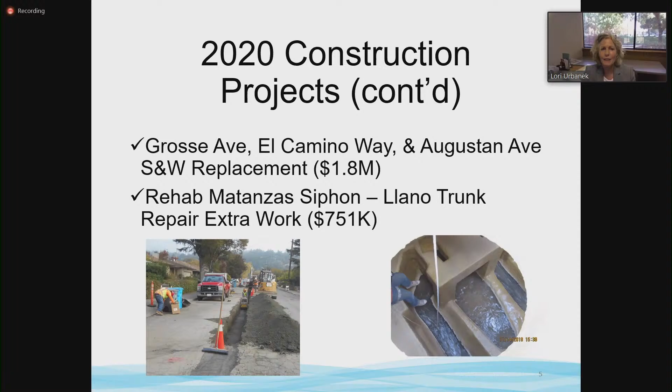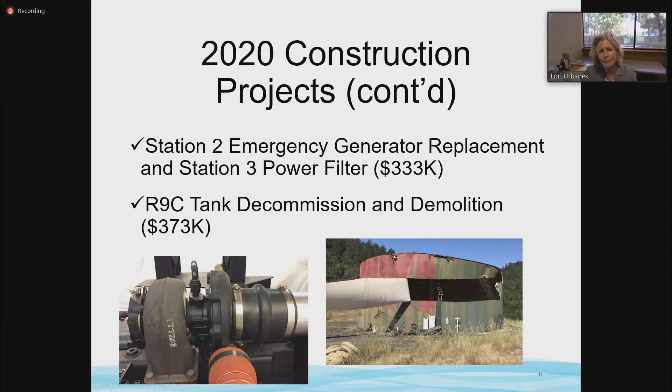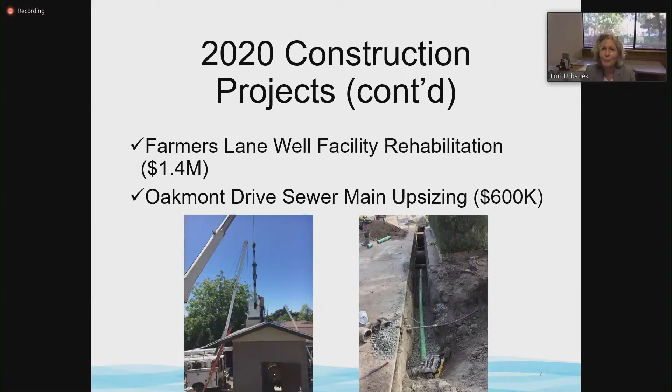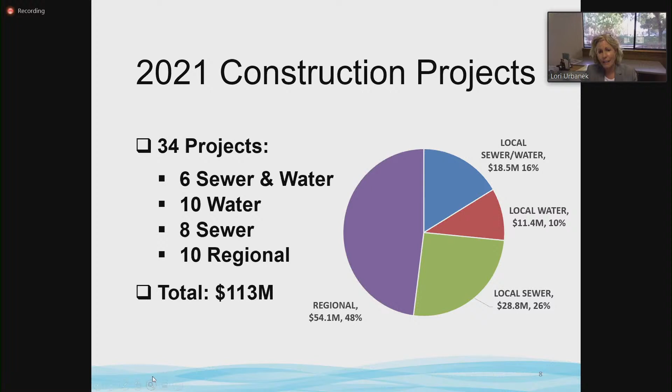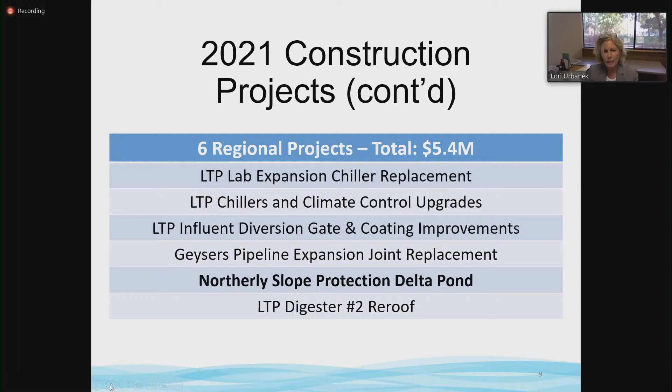These next several slides are going to list the projects that we have coming up, and there are a number of them, so I won't belabor going through each and every project. You'll notice we have 6 regional projects currently in construction for a total of $5.4 million, and one of them, the Northerly Slope Protection at Delta Pond, is bolded. In the next several slides, some projects have bold text, and the supervising engineers will be talking about those later in the presentation.

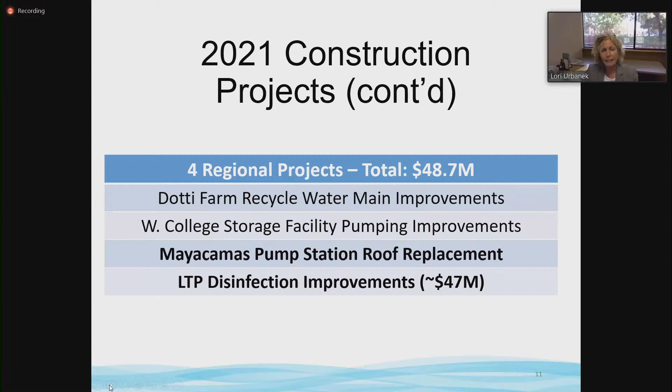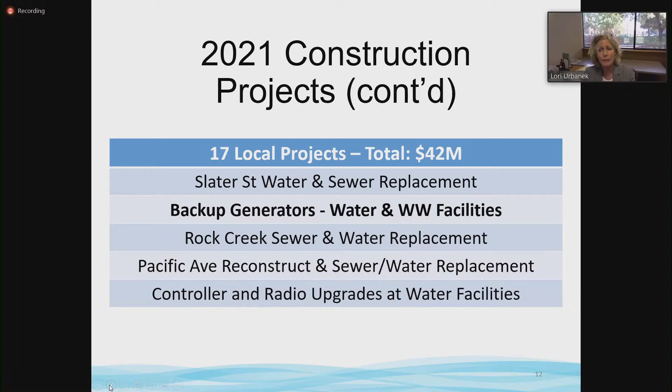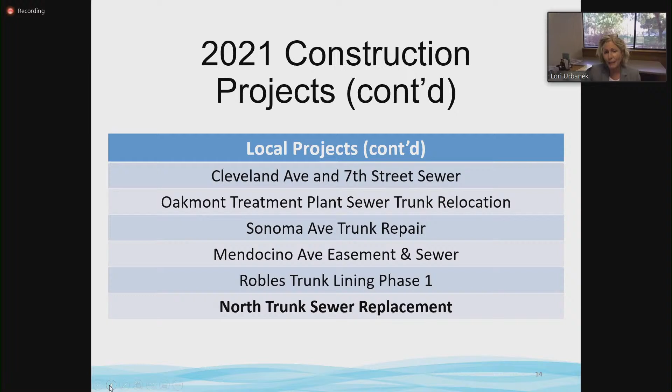Originally constructed in the early 1950s, the Matanzas Siphon is comprised of an 8, 12, 18, and 24-inch parallel pipe system that traverses under the Matanzas Creek corridor. The Rehabilitate Matanzas Siphon project utilized trenchless cured-in-place pipelining to improve this siphon system.

The original construction contract was awarded to SAK Construction for approximately $3.5 million and was substantially complete by the end of November 2019. The project involved an extensive value engineering cost proposal for the required sewer bypass pumping work. Implementation of that value engineering reduced the overall construction cost by approximately $1.9 million, as well as eliminated the need for a very elaborate temporary pipe bridge structure spanning the Matanzas Creek corridor for means of sewage conveyance.

If you recall, back in March 2020 the board approved a change of scope contract change order to rehabilitate a section of an existing 60-inch Llano trunk line adjacent to Llano Road, well outside the scope of the original contract. Back in the winter of 2019, an observed sinkhole over the trunk elevated concerns of a potential trunk line and/or road collapse.

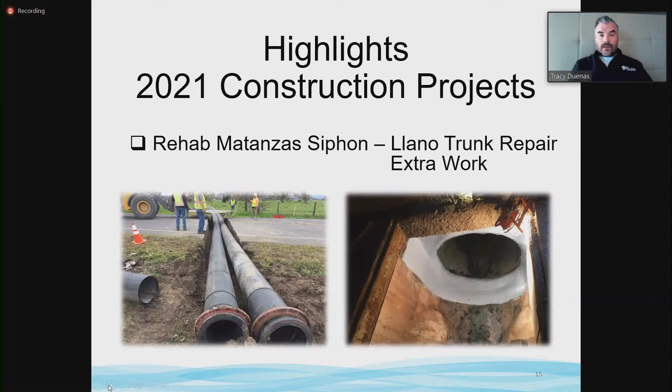Repair was substantially complete by the end of April 2020, and with consideration to the value engineering credit and the extra work costs for the added Llano trunk repair efforts, the final construction cost came in at approximately $2.3 million.

Originally constructed in the 1980s, Delta Pond stores tertiary treated recycled water conveyed from the plant. It is operated and maintained as part of the regional water reuse system. Given its size and capacity, the facility is also under the jurisdiction of the State of California Division of Safety of Dams.

The Northerly Slope Protection Delta Pond project rehabilitated approximately 5,100 linear feet of the northerly interior embankment section of the pond. The work consisted of mass undertaking of removal and replacement of approximately 2.5 feet of failed slope material, a mass grading project.

It also installed an additional layer of rock riprap for future protection against wave erosion, and vegetation. Given the operational constraints related to the required use and needing the pond during wet season, the contract specified construction over two seasons to minimize operational and customer impacts relative to completing the work on time.

Back in May of 2020, the board approved the contract to Granite Construction. In July, a notice to proceed was issued, and Granite proceeded with an extremely high level and efficient mode of operations, resulting in completing the work well in advance of the proposed schedule. Given their progress, Granite requested, and the city approved, completing both phases this year with the condition that it would be completed prior to wet weather. As of now, substantial completion is estimated in two weeks. Final construction cost for that project is estimated at approximately $3.3 million.

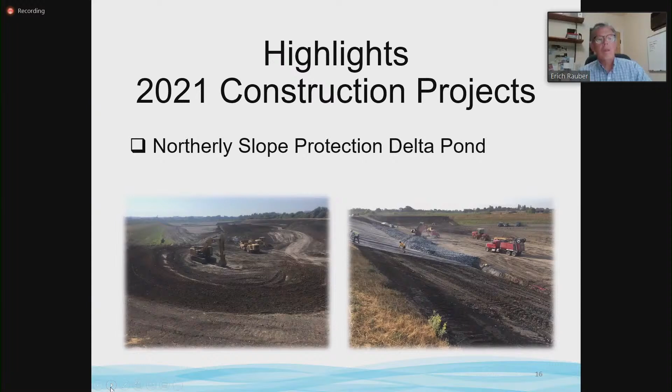Thank you, Tracy. Good afternoon, Chair Galvin, board members. I'm pleased to have this opportunity to describe the upcoming North Trunk Sewer Replacement Project to the board today. The North Trunk Sewer is a primary trunk sewer serving a large portion of northeast Santa Rosa.

It's accessed from Chanate Road, Parker Hill Road, and Terra Linda Drive. The project consists of installing approximately 2,200 feet of sewer trunk and approximately 3,600 feet of sewer collector pipe. It moves the old sewer lines away from Paulin Creek, reducing maintenance costs and reducing potential sewer overflows and creek impacts.

An innovative traffic control plan designed by City Traffic Engineering and the Fire Department will minimize traffic disruptions caused by pipeline construction. Modern trenchless technology will be utilized to install new sewer line up to 37 feet deep beneath Chanate Road, which will reduce construction costs and neighborhood disruptions.

Another component of the project is new water mains in Chanate Road and Lomitas Avenue, which will loop existing systems together, improving system performance and reducing maintenance costs.

On October 13th, bids were received with a low bid at approximately $9 million, which is about 17%, or nearly $2 million, under the engineer's estimate. Construction is anticipated to commence in July 2021 and will take approximately 2 years to complete.

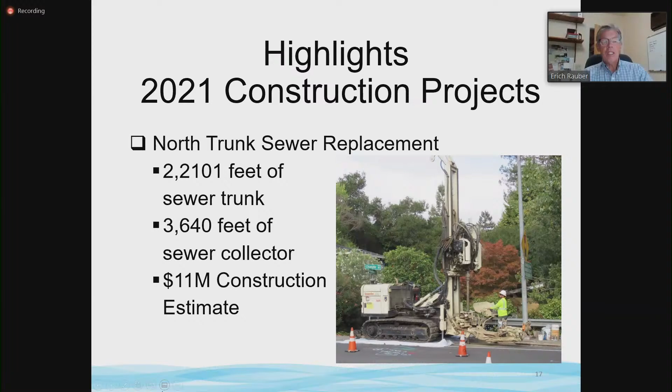I'd also like to highlight the ongoing R7 access stabilization repairs project. This project will stabilize an existing access road serving water reservoir tank R7. The improvements will consist of stabilizing approximately 800 lineal feet of roadway cut slopes, installing approximately 2,000 linear feet of HDPE storm drain line within the access road.

And within portions of Yerba Buena Road and St. Francis Roads up in northeast Santa Rosa, and reconstructing approximately 1,200 lineal feet of the access road. These improvements are necessary to mitigate ongoing slope instability issues and drainage issues impacting the existing access road and downslope residents.

The project was advertised in January 2020. Bids were received in February. The low bid was $1.5 million, which was about 8.5% below the engineer's estimate. Construction began in July 2020, and we anticipate it will be completed by the end of this year.

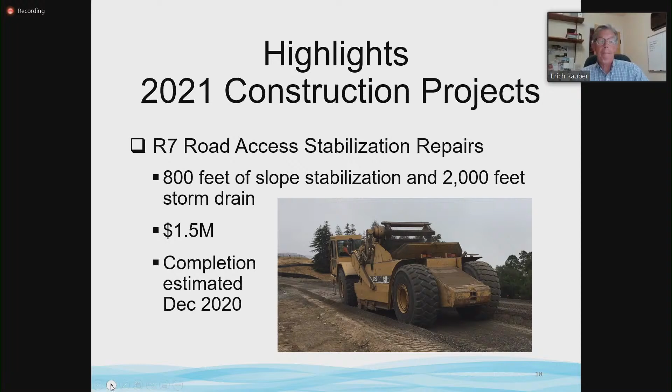Thank you, Eric. Good afternoon, Chair Galvin and members of the board. I'm excited to be presenting the rest of our highlights for this CIP update, and I'll be starting with the Llano Trunk and Glenbrook Siphon lining project.

We completed both phases of Llano's sewer trunk lining project, the first phase lining the Glenbrook Siphon. As Tracy pointed out, there was that emergency project to rehabilitate the Matanzas Creek Siphon. The Glenbrook Siphon is essentially the sister siphon to Matanzas, and the condition was quite similar and very poor in some locations, as you can see in the photo to the left, indicated by the exposed rebar.

We were able to successfully line this, and we're thrilled with the results, as you can see in the photo to the right. Last week, we just completed the second phase of this project, which lined approximately 3,800 linear feet of 54-inch concrete pipe along West 3rd. The bypass system was shut down as of Saturday, and we have begun breaking down the bypass piping as I speak. We anticipate completing the project within about two weeks.

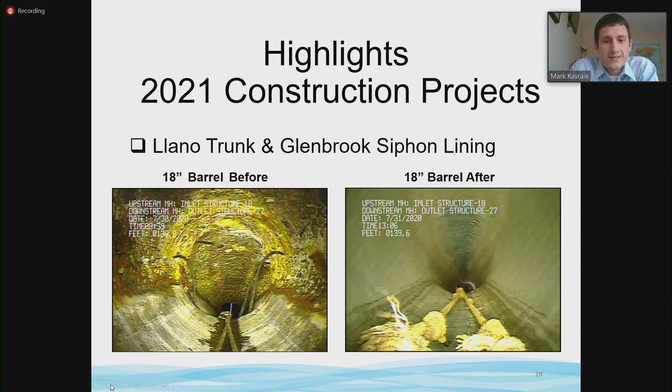As I'm sure you know, lining projects tend to be higher risk and impactful to city residents, and this was a very successful project. We are excited to be completing this $6 million project. Next slide, please.

Okay, so moving on to Mayacamas. Mayacamas Pump Station is the 4th pump station along the Geysers pipeline. It's a critical facility, moving an average of about 12.5 million gallons of recycled water per day.

It is actually built on a wildlife sanctuary held by the Madrone Audubon Society, and is also held by a conservation easement held by Sonoma County Agricultural and Open Space District.

The station was constructed with a living roof some 20 years ago and has since begun to leak. This roof project was brought to CIP in late November of last year, and we have since developed plans. We've coordinated with outside agencies, and we've also advertised the project. So we anticipate construction will begin next month. We're very excited about that as well.

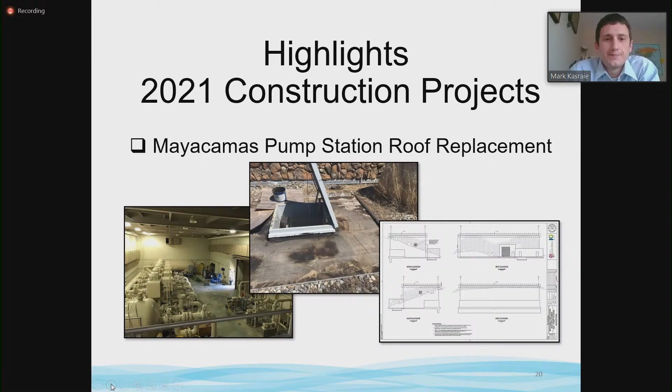Next slide, please. The Laguna Treatment Plant's Disinfection Improvements Project is an exciting solution to the plant's need for greater system capacity, reliability, as well as operational control.

This project has been a substantial effort since 2012, and we will be approaching construction soon. Next month, I anticipate bringing 3 items before the board for consideration, including an approval of an addendum to the Incremental Recycled Water Program Environmental Impact Report, or EIR, as well as 2 contract documents, essentially professional services for engineering services related to construction.

As we've previously mentioned, the construction cost is estimated at $47 million. Beginning construction summer next year, we anticipate completion of this important project by end of calendar year 2023. So we do anticipate a 2 to 3 year period for construction.

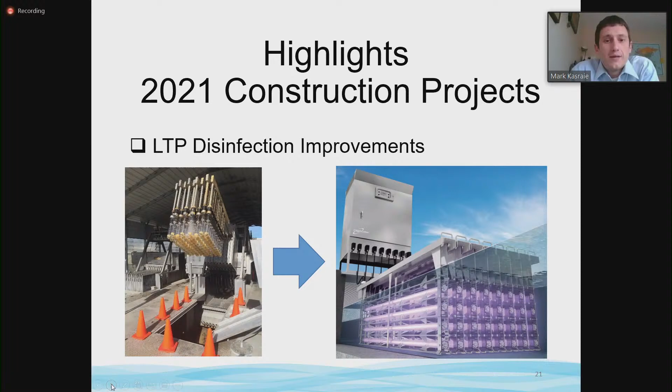Next slide, please. Another interesting project we're making good headway on is the backup generator project for various water and wastewater facilities. Following the 2017 Tubbs fire, we evaluated emergency infrastructures with the need to increase resiliency in future disasters.

Armed with lessons learned, we applied for FEMA funds to replace generators at water and wastewater pumping facilities. Those funds were awarded by FEMA November of last year. Those funds are part of the hazard mitigation grants, and they provide about 75% of certain costs, including design and construction, with a maximum reimbursement amount for this project of $3.5 million.

This year, we've begun design for replacement of systems at 18 sites around the city. And Station 15, we are currently in construction, and so the replacement for the generator at this station was included in the original application, but due to the project being well ahead of others, has since been removed from the grants. This helps facilitate more rapid completion of our construction project and allows for continuity of critical water operations.

But for the majority of the sites, however, we do expect to complete design early next year, with construction starting in the summer of 2021. We anticipate completion of construction, project closeout, and grant closeout by November 2022. Next slide, please.

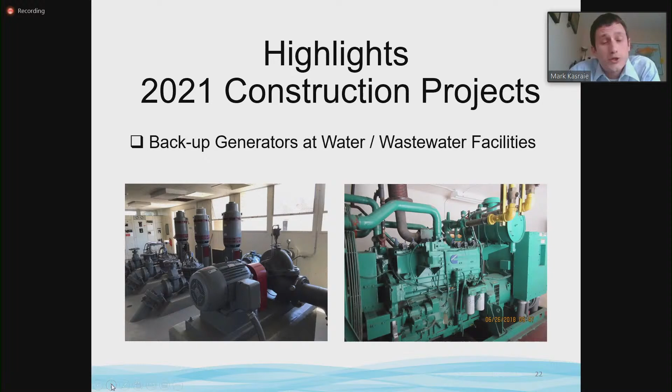I'll be briefly touching on our public assistance projects as related to the 2017 Tubbs fire. I'm also pleased to mention that we advertised 2 more utility projects related to this Tubbs fire. These 2 CIP projects combine a total of 5 FEMA utility projects to realize some efficiencies with construction administration, as well as bidding and general project delivery. So we're essentially seeing an economy of scale by not having to administer 5 separate CIP projects.

And those 2 CIP projects I mentioned are Skyfarm A and Hansford Court Sewer Lift Station Reconstruction Project, and fire-related repairs of utility stations project. Next slide, please.

So briefly touching on both, the Skyfarm A and Hansford Court Sewer Lift Station project reconstructs 2 sewer lift stations that were completely destroyed by the fire. This comes at a cost of $3.4 million, and we anticipate completion of construction summer next year.

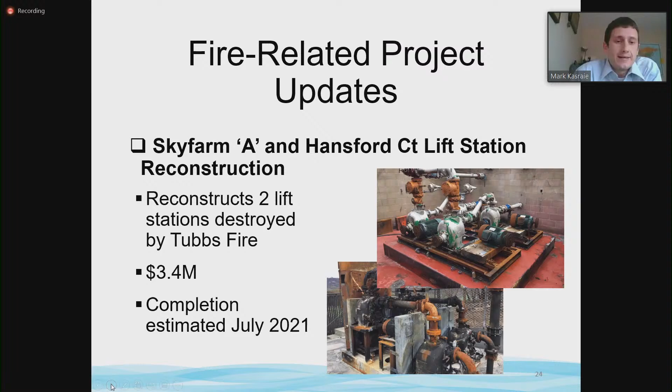Next slide, please. And then the other project, fire-related repairs of utility stations, is intended to repair various damages observed by the Tubbs fire at various water department facilities. Most of the damage was perimeter fencing, some minor water appurtenances such as irrigation, backflow preventers, water meter boxes at these stations.

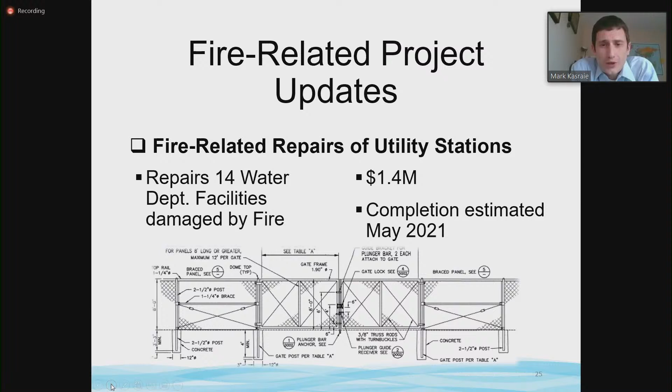And there was one generator as well that was completely destroyed at the sewer lift station on Stagecoach Road in Fountaingrove. So this project comes at a cost of $1.4 million, and it too is slated for completion summer of 2021. Next slide, please.

And with that, I'd like to hand it over to Lori for final comments. Thank you, Mark, and we're happy to entertain any questions that the board members may have.

Thank you very much, Deputy Director Urbanik and the supervising engineers. Any board member questions?

I have a question. On the UV project, you said 47 million. Is that only the city portion, or is that the entire regional system?

Deputy Director Urbanik may be best to answer that. That's the total construction cost. I don't actually know how it gets broken down to the different regional partners, but I do know we are anticipating funding from those partners for this project. Is that correct? Yes. So roughly 75% will come from Santa Rosa funds, and the rest will be split among the sub-regional partners per the agreement. So that's the total construction cost, and then it'll be split among the partners.

So it seems to me that it's actually less expensive than we originally thought a year ago or 6 months ago, whatever it is. I don't know, I thought we were borrowing 60 million. That's my question.

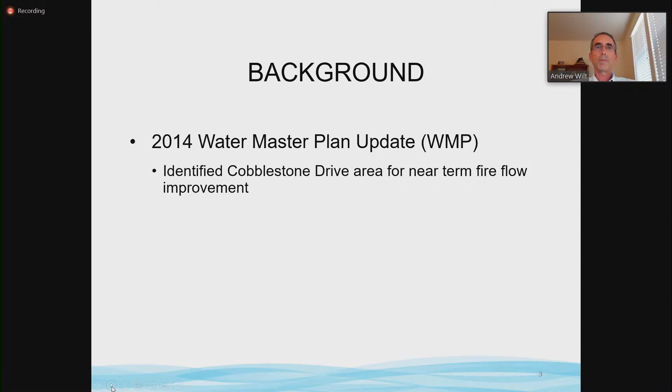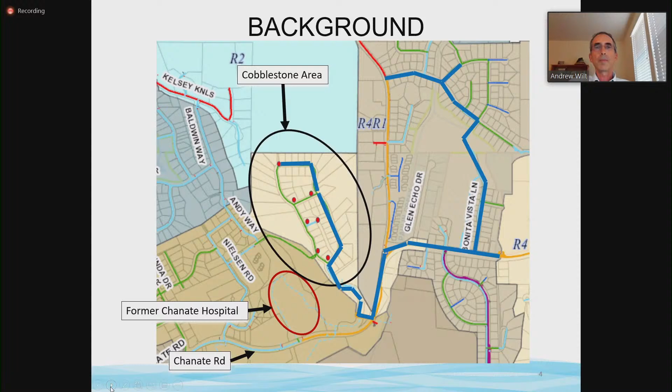Since the water master plan update was completed, several alternatives to resolve the fire flow deficiencies have been evaluated. First, the water master plan suggested replacing the existing pipes in Cobblestone Drive and Chanate Road as shown on the previous slide. The next alternative was installing a new pipeline from Tillmont Way to Cobblestone, approximately 1,200 linear feet, significantly less than the project identified in the water master plan. The last alternative was to replace and upsize the existing AC pipes from Andy Way behind the Chanate Hospital through an existing easement to Cobblestone and then up Cobblestone to the highest fire hydrant, approximately 2,000 linear feet.

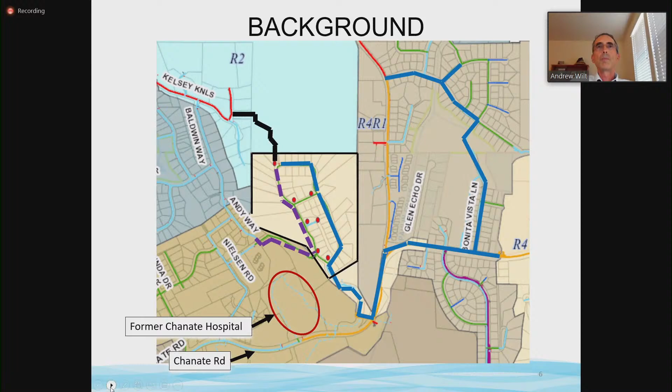The first alternative from the water master plan was eliminated early due to its high cost. A life cycle cost analysis on the remaining two alternatives concluded they were approximately equal, assuming environmental impacts are equal as well. The alternative to install a new pipeline from Tillmont Way to Cobblestone through private property was selected due to easier operation, with fewer pressure reducing valves to maintain and operate.

Approximately 48 households would have improved fire flow from this project. A recent cost estimate shows the total estimated project cost to be approximately $800,000, or $16,700 per household.

The selected alternative requires the acquisition of two easements. The first is located at the northern side of an undeveloped residential property at 3600 Tillmont Way. This easement would be in the building setback area, so it would not prevent development. The second easement would be located across Keysight Technologies property. We had brief discussions with both property owners, so they're aware of the project.

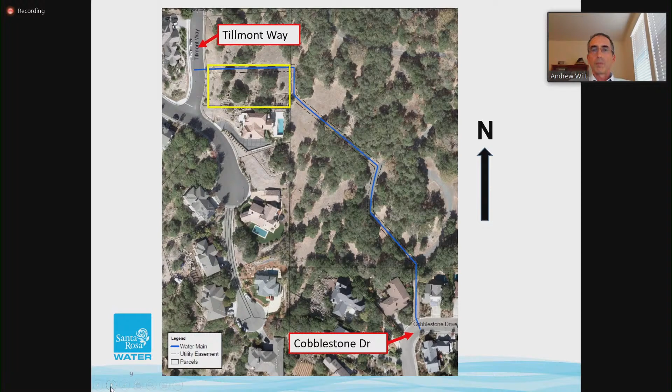I'll show a few photos to provide an idea of what this landscape looks like. This photo looks across 3600 Tillmont Way, looking east. The blue arrow represents the proposed water line. It will progress several feet to the right of an existing concrete swale located on the adjacent property to the north. As you can see, some tree pruning may be necessary to facilitate installation.

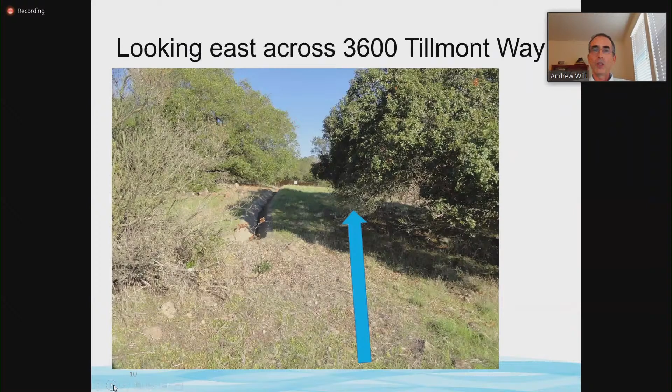This photo shows the approximate location of the water main as it heads south across the grassland on Keysight property, adjacent to the fence. The 3600 Tillmont Way property is on the right side of the fence.

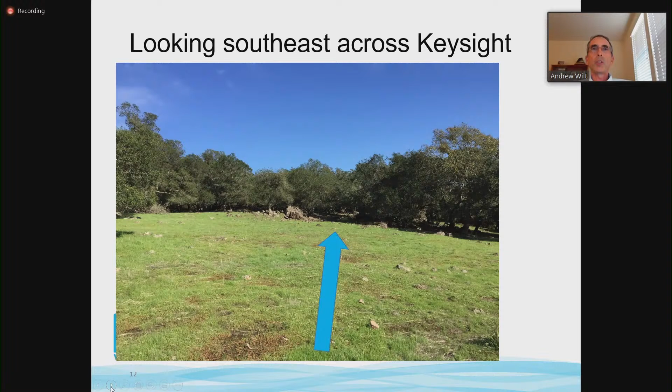Thank you, Andy. Good afternoon, Chair Galvin and members of the board. I'm Justin Witt with Brelje & Race. I worked on the CEQA process with Andy, who provided the engineering expertise, along with a couple other engineers from our office. I wanted to take the opportunity to run you through the CEQA process followed for the Cobblestone project. As many of you likely know, the purpose of CEQA is public disclosure of projects in the public sphere, as well as disclosing the potential impacts associated with those projects. It also allows the city the opportunity to identify and develop mitigation measures to reduce the severity of environmental impacts.

There are three levels of review under CEQA. We went with the middle level for this project, the initial study level.

We prepared the initial study on June 21st, 2019. After that, we went through the 30-day CEQA required public review period, which ran from June 21st through July 22nd, 2019, after which we responded to all comments received. There were two issues that came up after the public review period closed that were a little unique to this process. I'll discuss them in more detail briefly later.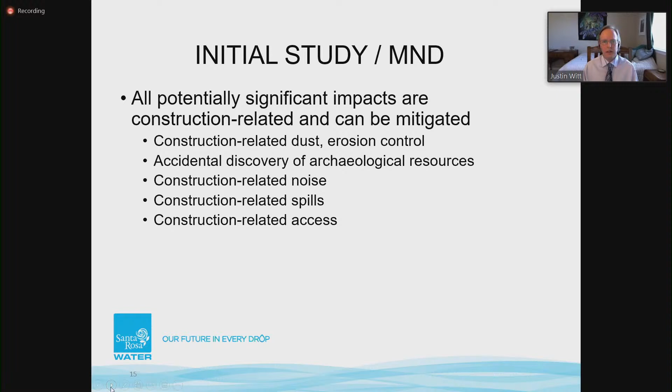During the initial study preparation process, we prepared a biological resources assessment, a tree assessment, and a cultural resources assessment. The cultural resources assessment did not identify any known documented resources and did not discover any during field work. The tree assessment identified 55 trees within the preliminary alignment. The engineering team looked at realigning slightly to avoid as many as possible, and were successful - only one 7.5-inch coast live oak would be removed. This is not a heritage oak tree; it's smaller than the 18-inch size that would qualify it as such. Because of that, and because it's a public works project, it does not conflict with the tree ordinance, so there's no impact there.

Due to the well-treed nature of the site, we needed to do pre-construction nesting bird and roosting bat surveys prior to constructing the project to ensure we don't harm or otherwise discourage nesting birds or roosting bats.

The biological analysis identified 6 special status plants that may be present. None of those are on the state or federal Endangered Species Act, but they are on the California Native Plant Society list, so are therefore granted special status under CEQA. To mitigate for that, we would do a pre-construction survey, and if the plants are found present, we would move them to a different location under the review of a biologist.

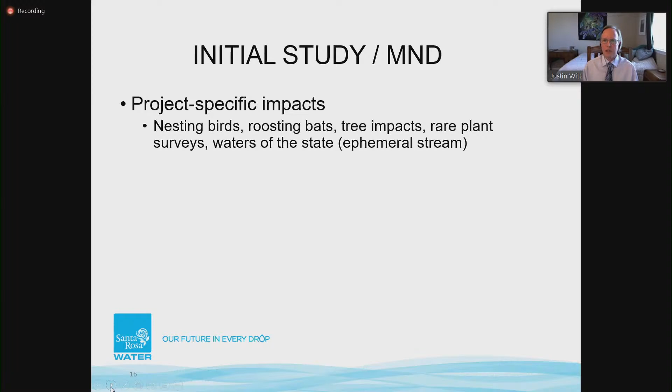Back to the public review: the project had the 30-day CEQA required public review process, which ran June 21st to July 22nd, 2019. The notice was published in the Press Democrat and at the county clerk. In addition, the initial study was sent to the state clearinghouse, which started a 30-day concurrent state agency review process.

The notice was mailed to owners within 500 feet of the project extents, and copies of the initial study were made available on the city's Transportation and Public Works website, as well as the physical office.

As part of CEQA these days, we need to engage in tribal consultation as required by AB 52. We did this during development of the initial study so we could capture any required consultation within that document. The city mailed requests to 7 tribes, the largest two being the Federated Indians of Graton Rancheria and the Lytton Rancheria. We did not receive requests for further consultation from any of that contact. However, the Federated Indians did request a modification to the accidental discovery mitigation, wherein they would be included as the contact. We accommodated that request, and it's reflected both in the initial study as well as the mitigation monitoring and reporting program.

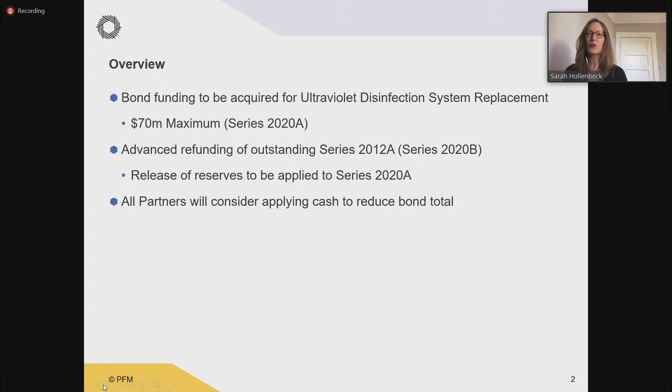Great, thank you so much, Kimberly, and Chair Galvin and board members. Pleasure to be with you this afternoon. I hope you can hear me okay. Great, thank you. So let's move to the next slide.

Kimberly gave a good overview of what we're here to talk about today. And just to frame the opportunity, as was discussed, interest rates are not at, but very near to, all-time lows. So we have two components to the financing being proposed to you this afternoon. There is the borrowing that will fund the UV project that was described, and that would be new money financing, which would be borrowed in the tax-exempt bond market.